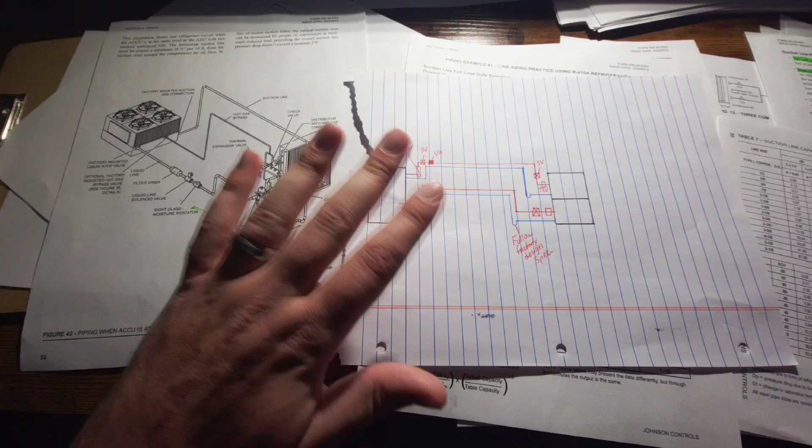Why does all of this matter? It matters because of our oil return and our ability to carry the load of the refrigerant. So if we don't size this properly, one, we're not going to get the proper BTU flow through the refrigerant stream.

Which means the system is not going to be able to keep up. We're going to have problems at the compressors and at the evaporators with them controlling load properly. And two, we're not going to get the oil return that we need, which is where these traps become very, very critical.

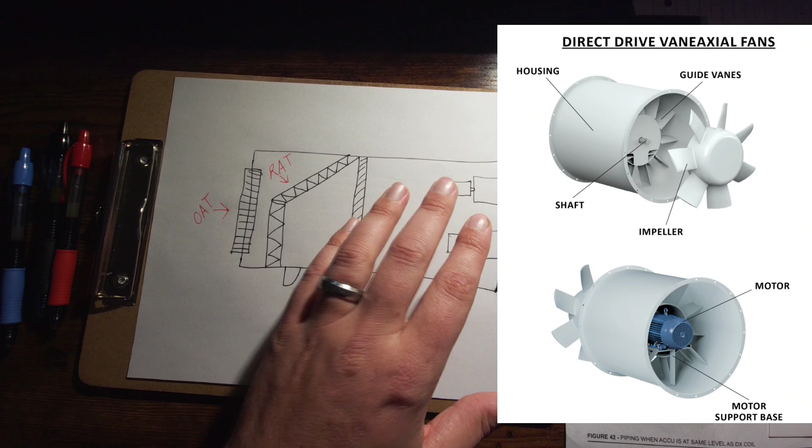What we're working with is we have an air handler on a roof that is serving a multi-story building in a downtown space. So this air handler has a vane axial fan assembly that is running all the supply air, and our refrigerated coils are right here.

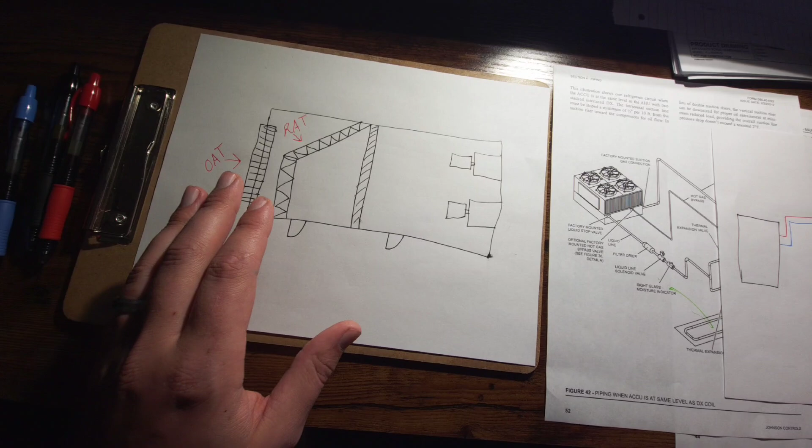Now we've actually got two condensers. They're split system carrier, they're 80 tons, that currently serve these coils. We're replacing those condensers and putting in new York YLUA 95 ton condensers in their place. That was an option that the customer requested.

They wanted their total system design allowed for the little bit of extra tonnage, so they went for it and chose it. So the scope of this job is we're coming in, we're moving these coils here, and this is actually two banks. You have one bank here and one bank here on an angle, and these two banks are what serve the supply air for this air handler running multiple floors.

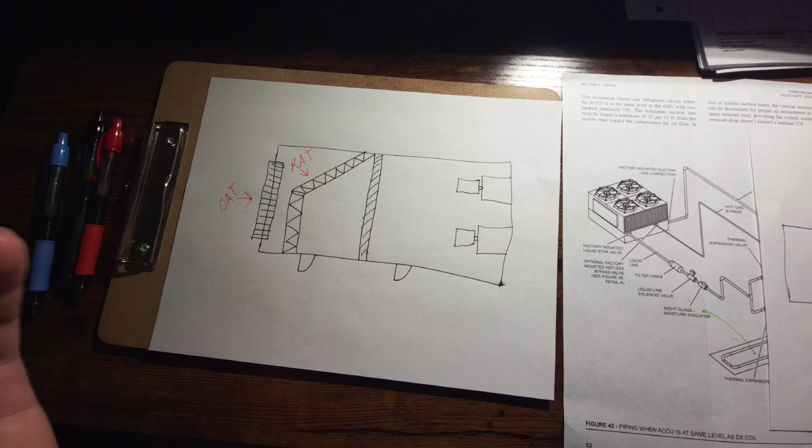The condensing units are over here to the side outside of the penthouse where this air handler lives. Typically in a situation like this, we bring the manufacturer in, we walk it with their design engineers, we go through this whole process. Jobs like these take a year, 2 years to put together, bid, go through, get approved, order. A lot has to happen to make these kind of jobs happen.

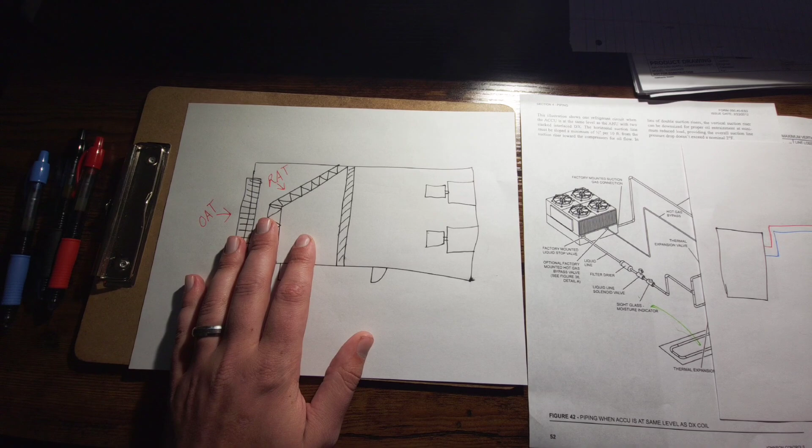When we got to the site and began to really look at okay, how did we need to finalize the piping schematics so that we knew exactly how to go back with this and what we were going to do, we could not get a solid answer from York as to what they wanted us to do. Specifically for this exact application, could we reuse the old line set? Could we get the new line set?

They wanted new systems, one, because they had really old carrier condensers, and they wanted something more efficient with better loading abilities and that had a newer refrigerant. So all of these are R22, and they wanted a 410A system.

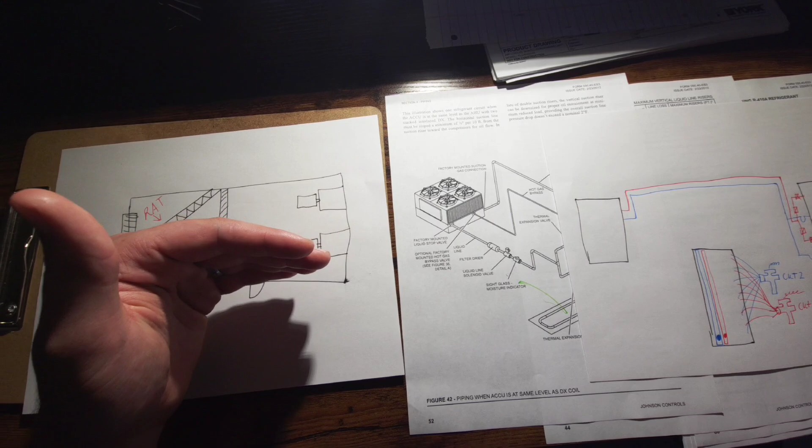The old carriers are semi-hermetic Carlyle compressors, and we had 2 circuits per condenser, 1 compressor each circuit, whereas the new system is 2 circuits, 3 scroll compressors per circuit. So we have a lot more loading and unloading capacity in our ability to really fine tune it.

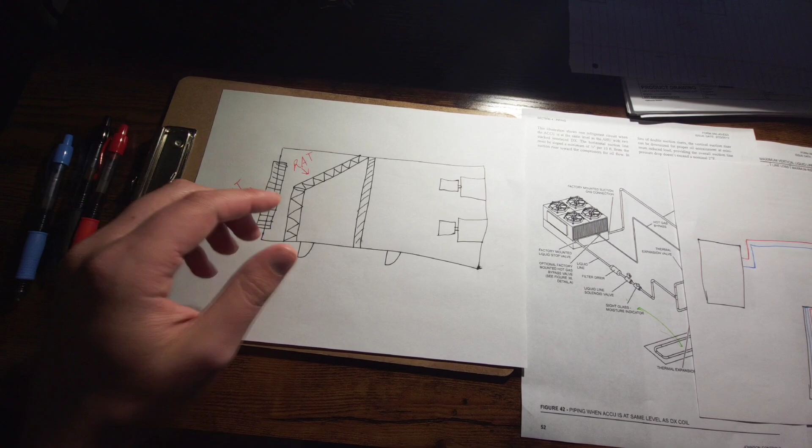And one of the struggles they had is during the low load times, they were constantly having issues having to short cycle the carrier condensers because they couldn't quite match the load the way they really needed to. And keep in mind, there's an automation system that makes this whole entire puzzle function. The condensers have some onboard controls that are mostly built there for safety purposes, but for the most part, building automation is actually what is controlling the brain for this entire setup.

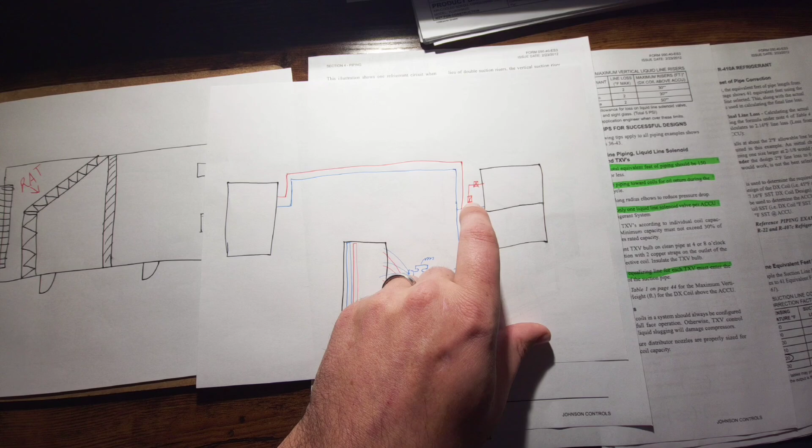To kind of give you an idea of how the original was set up, here at each bank you had a set of stacked coils, and this was times 2, and I'll get into what I mean by that. But each circuit had a liquid line that come out, and then it would hit this little header assembly, and they went through 2 solenoid valves and then went into each TXV, and then the suction lines came out, had a trap, and then hit a header that come up and come all the way back to the condenser.

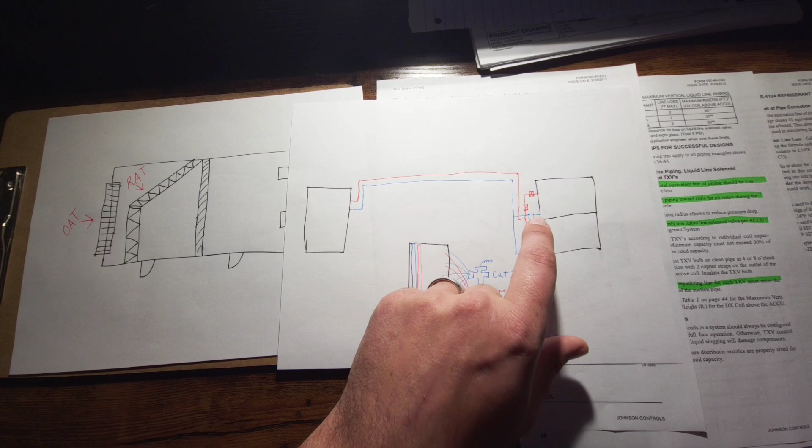They ran 1 1/8 inch liquid line and a 2 1/8 inch suction line for this on this R22 system. This was times 2 for the other circuit. So you had another set of liquid and suction line come out and did this exact same thing, and kind of a depiction here of it is each TXV, you've got the distributor tubes that kind of split the entrance of the coil, and what that means is this entire coil, both coils in this instance, are actually having refrigerant flow the entire time.

We are processing all of the air moving through this coil at any given time, and it would be the case for both sets of coil banks. You see the suction headers come out the other end of the coil and flow through. I have another diagram here I will show you.

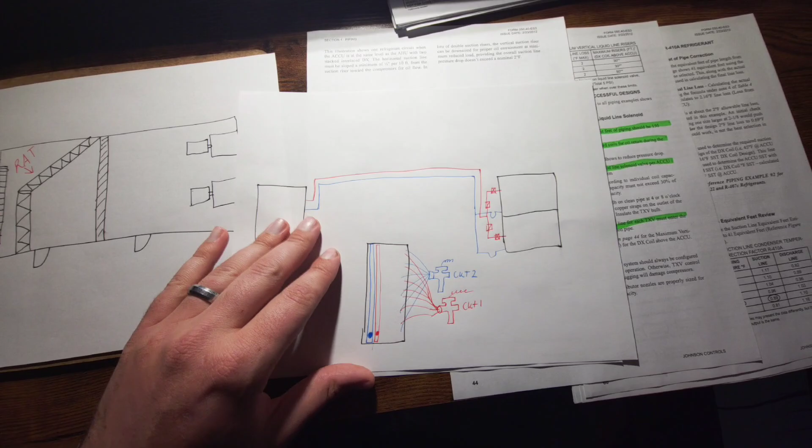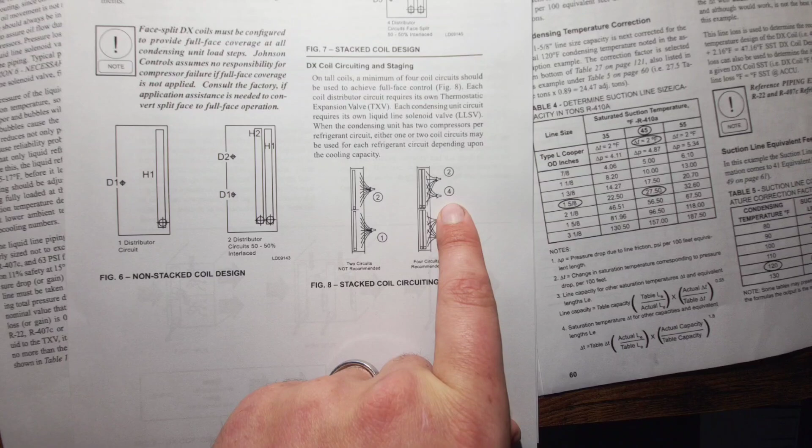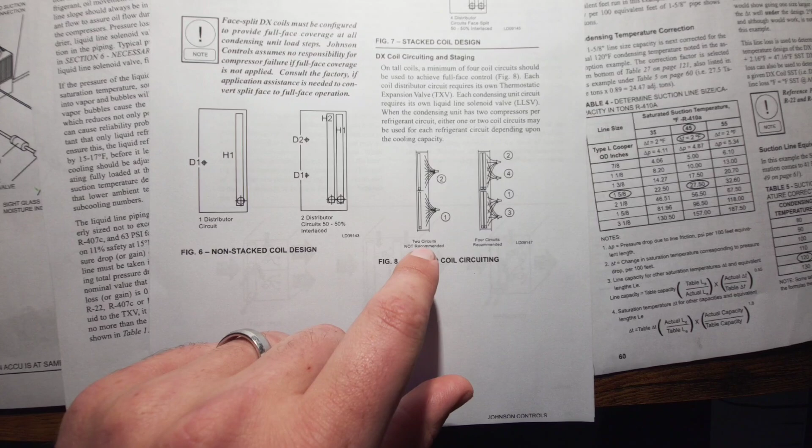On this diagram, and what's funny is that this is all York data, by the way. They state that their recommended setup is a 2-circuit coil stacked, when you do a stacked coil system like this. Your circuit 1 would have TXV 1 and 2, circuit 2 would have TXV 3 and 4, and those would serve in a stacked coil instance. They even specifically say in a 2-circuit or stacked coil scenario not to do individual circuits. You know what's funny? York designed this to be exactly this way, against their own specific recommendation.

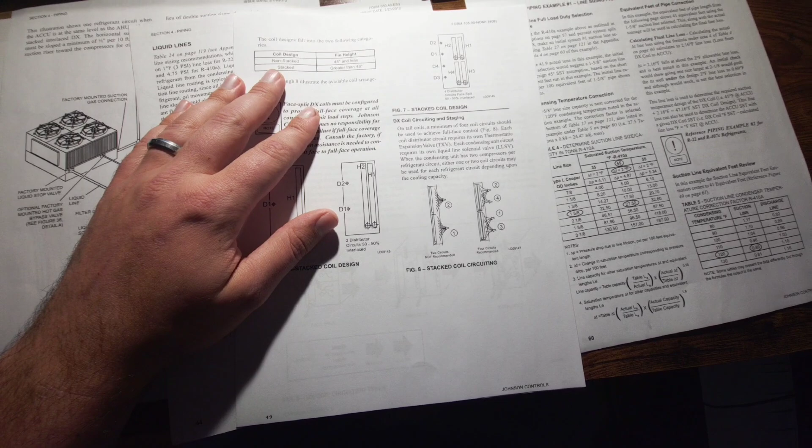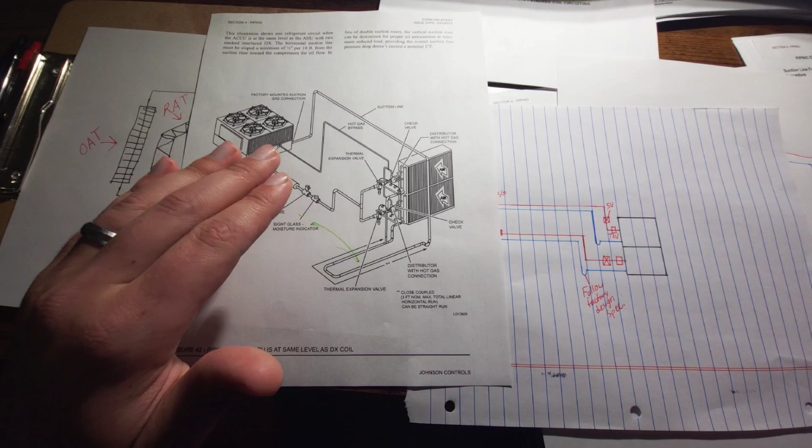That is how the current system is set up that is in place. What that left us in is now we're in a position where we've got a completely different setup. We've got a situation where we've got stacked coils, and they're expecting us to serve one coil per condensing unit. When we first got all this paperwork and got the design based off their own paperwork, which we are level, this unit is designed to where the evaporator could be several stories above the condenser, could be several stories below, or even at the same level or same story as the condenser.

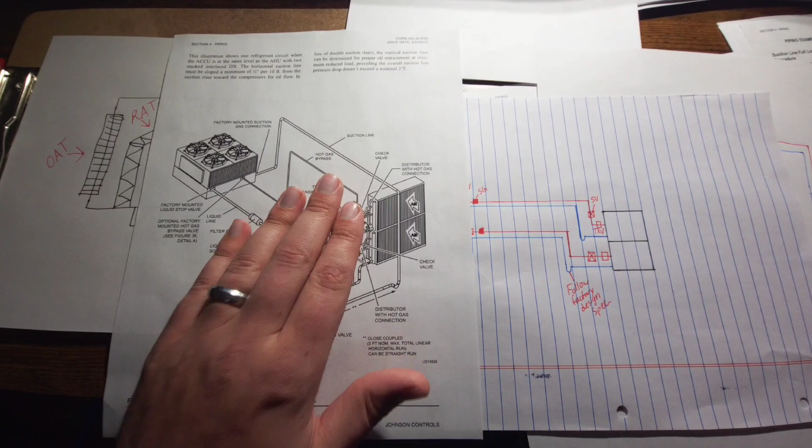It's just traveling across a horizontal face instead of having any kind of vertical run. Per their own setup, this was how they were depicting they wanted us to hook it up. The problem is we've got a 2-circuit machine, and that's not the way. This is not what they sent us when they gave us all the material, the coils. This isn't what it looked like. It didn't look like any of this, because here you've basically got one main liquid line coming in, splitting between the coils, which, going back to their schematic, this is what they recommend.

They want you to have a split header so you get all the surface area covered, and then you would have one main suction riser coming back up and out, going back to the condenser. You can also have a hot gas option. I'll talk about that more a little bit later. We do not need that with our current setup.

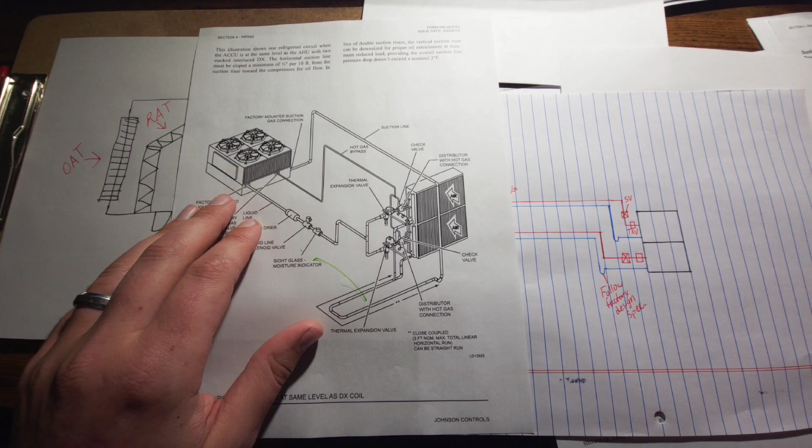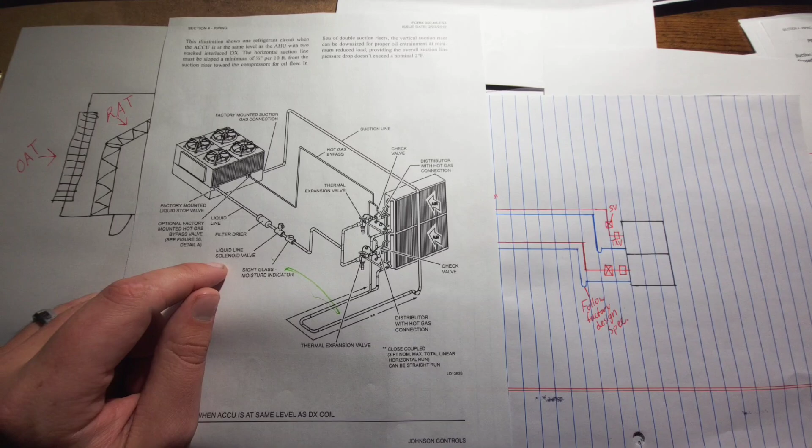One of the things I do want to point out as I'm going through this is the design principles, for you guys who are still in school, maybe looking to go to school, getting ready to. There's going to be things they cover in terms of oil return, velocities, and proper piping design if you go to a really good program. I know there's programs out there that don't even bring that stuff up. But if you do, don't brush over that information, because I remember doing this stuff when I was in school, and jobs like these are where it came to really benefit me.

So what that led us to is, okay, are we actually supposed to have a split coil setup, or were we supposed to have a dedicated coil, meaning each coil was going to be dedicated to a single circuit? Because if we're looking here, we have one set of liquid and suction line coming out and another set for this circuit. So here's your 2 circuits. If we're supposed to run these together, this machine was not designed for circuit 1 and circuit 2 to all of a sudden become one big tandem circuit. That was going to cause a lot of problems and complications.

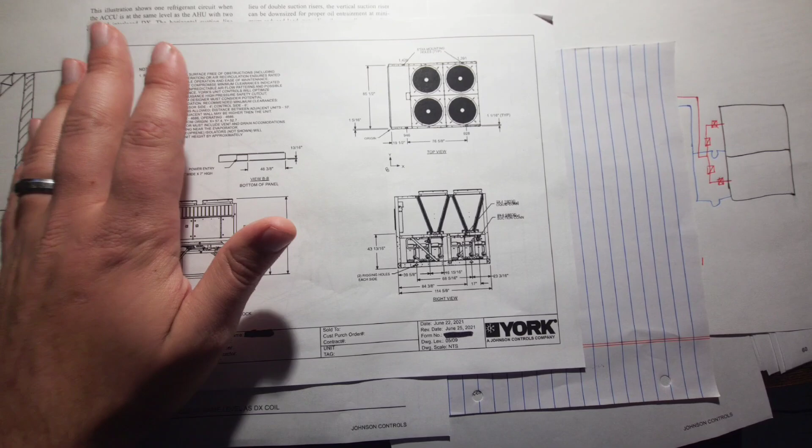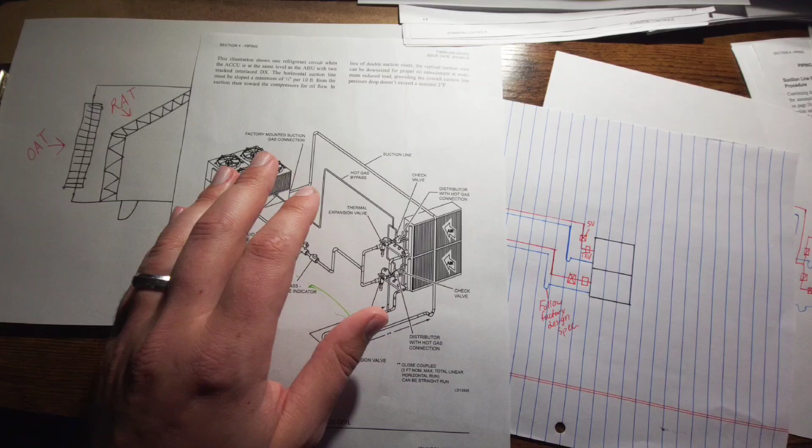Honestly, ultimately, it doesn't make a whole lot of sense that they would have us do it that way. Between the fan cycling controls and the compressor controls, and then the velocity issues we were going to have because we had such big pipe at that point, it just did not make sense that we could have reasonably needed to tie the 2 circuits together the way it was being depicted. What this is leading to is York is contradicting themselves in how they actually designed the system versus what their recommendations on system design is.

Eventually we came to the understanding that we were going to need to do a dedicated coil per circuit. That was the simplest thing, which meant that this header assembly went away, this whole setup went away, and that was no longer going to be the case. We weren't going to have this, because the coils we received were single circuit coils, actually just like the ones depicted here. These are single circuit coils. This would be considered a dual circuit coil.

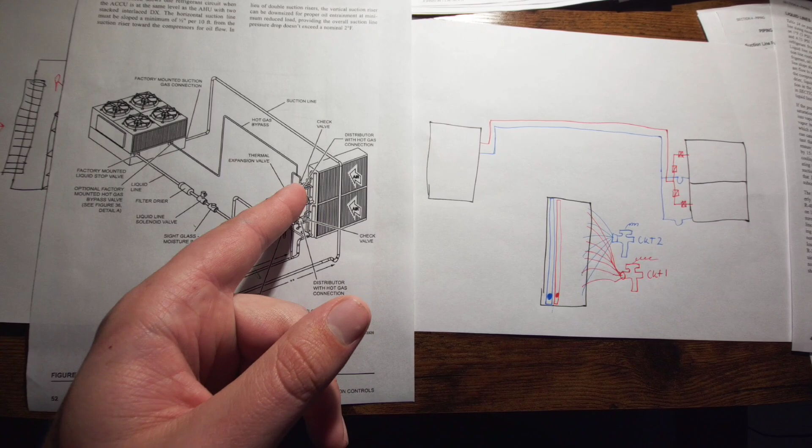So we got these coils in to replace the existing coils, which meant that our overall design did change when they sent us this equipment. Now that has other ramifications that I'll get into later about how the automation system is going to be able to control that, and we'll discuss that in a bit.

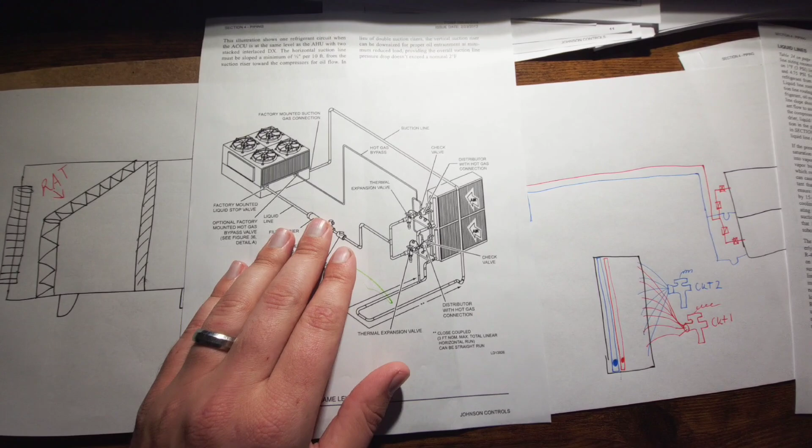But then we had to decide, okay, is the existing piping going to be sufficient? Can it stay? Do we have to replace it? Keep in mind, we're talking about replacing almost 100 feet per circuit worth of copper. You're talking 4 circuits total. We're talking tens of thousands of dollars worth of copper and manpower to do that. That's a major expense to go onto the project.

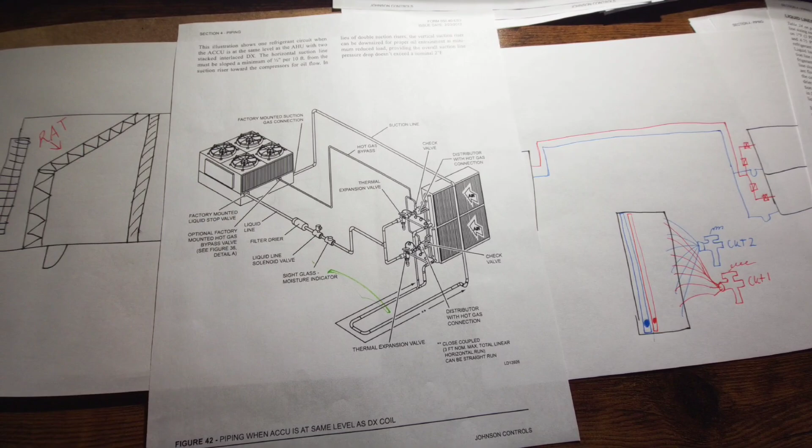Obviously, with a 410A conversion, we will need to do a flush on the line set if we decide to keep it. So with us settling on, okay, York intended us to have dedicated coils - I know everything in this book tells us that they never want that to be done, but ultimately that is exactly what they sent us. We have 50-ton circuits on this machine, and those circuits are able to go from that nominal 50 tons to a little over 17 tons.

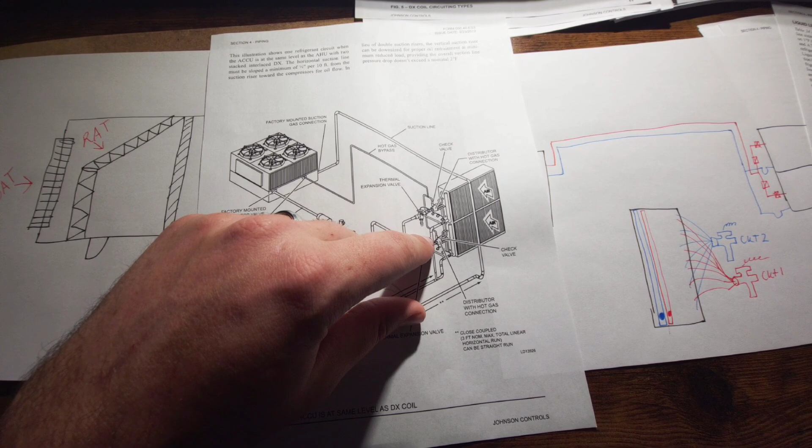These TXVs being 50-ton valves, they're the OVE 50s. They have an ability to derate themselves down to 30% of total capacity, meaning that if you do the math on that - so that is 50 multiplied by 0.3, takes you down to 15 - so we can do as little as 15 tons of refrigerant volume through these valves and still be able to maintain superheat control on the suction line. So that matched up perfectly.

Now we're entering a stage of, okay, what lines do we actually have? Like I said, on average, you've got just shy of 100 feet of actual line set length. I'll use one unit for an example - has an actual length of, we'll use the liquid line, of 60 feet total. Now, there's some things and some design parameters you have to take into account when you start looking at this. So that's 60 feet from the unit to that coil and where we're tapping on that TXV. We have to calculate the physical length and each of these turns.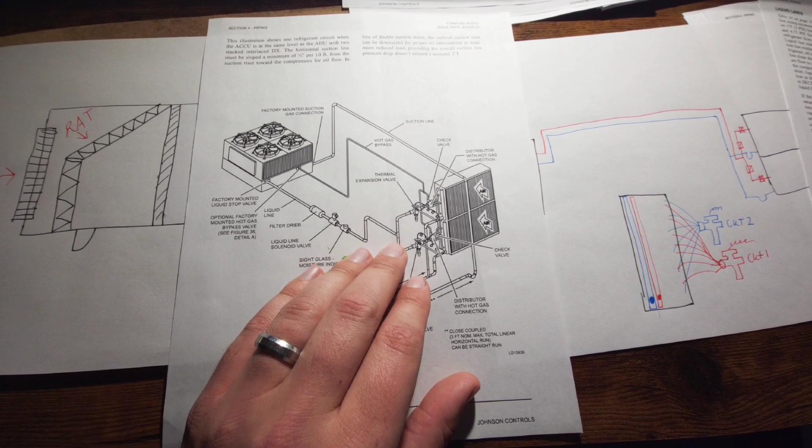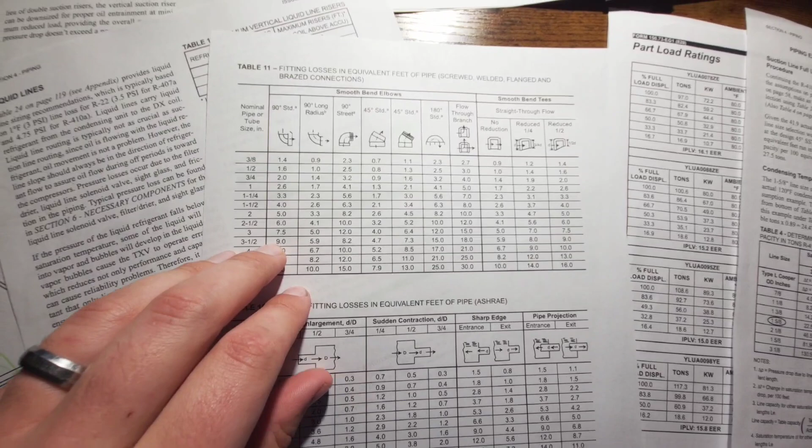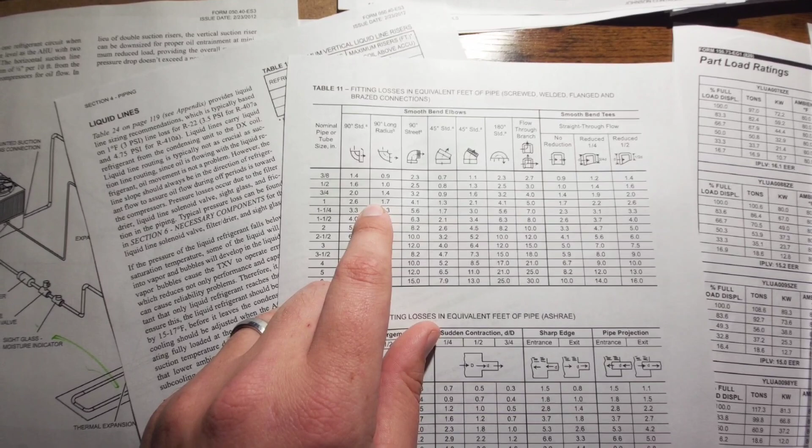Each 90 and T, every one of those joints creates a restriction in the system. So we have to calculate that into our overall total footage, which I have a chart here. This chart does exactly that. So we're able to go, and so we know that this is in OD sizing. So 1 inch is our 1 1/8 inch. So we know that for every standard 90 installed at 1 inch on the liquid line is equivalent to 2.6 feet of actual line length. That's the amount of restriction that it creates. If you use a long radius, you're able to cut that down to just shy of 2 feet.

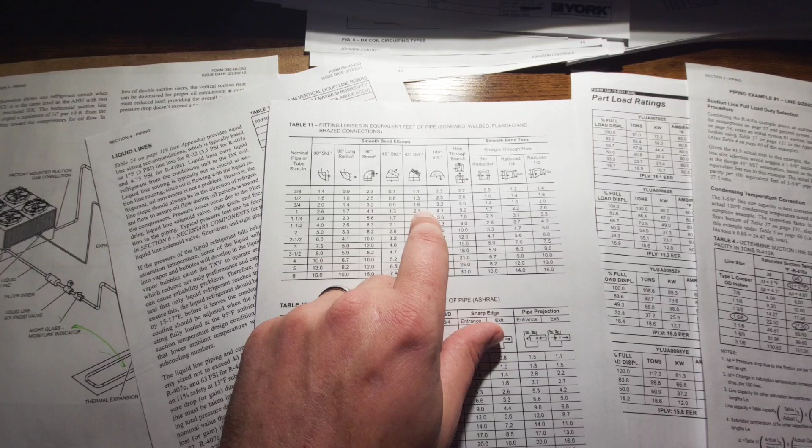So as we roll through this, these are the additional calculations we're having to factor in. So over here, that actual 60 feet that is the physical length measured, you calculate the joints that we have to create to get from here to here, you end up with actually just right at 100 feet, which fortunately for us is right at design specifications. Per their ratings, they will allow 100 effective feet or 150 calculated feet based off of their piping designs and the information they sent us on this equipment.

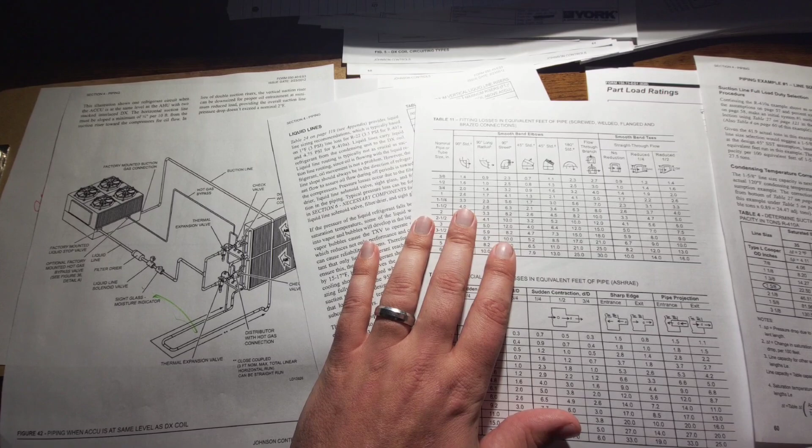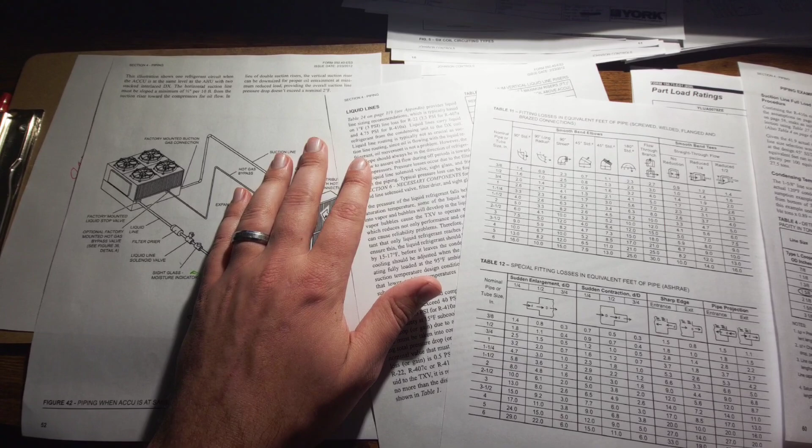They quite literally sent us 5 different submittals for this equipment and coils, which totaled out to be about 300 something pages worth of documentation. I was able to sort through that because that was blended between 410A, 407C conversions, and R22 systems, and I got a little under 100 pages worth of relevant data to just the 410A side, which is what I was focused on, and I've been able to extrapolate everything I need from there.

We know that we're pushing the limit on the line length, with it being 1 1/8 inch. So the existing system is 1 1/8 inch on the liquid, 2 1/8 inch on the suction. There's some things we have to keep in mind as we're going through this.

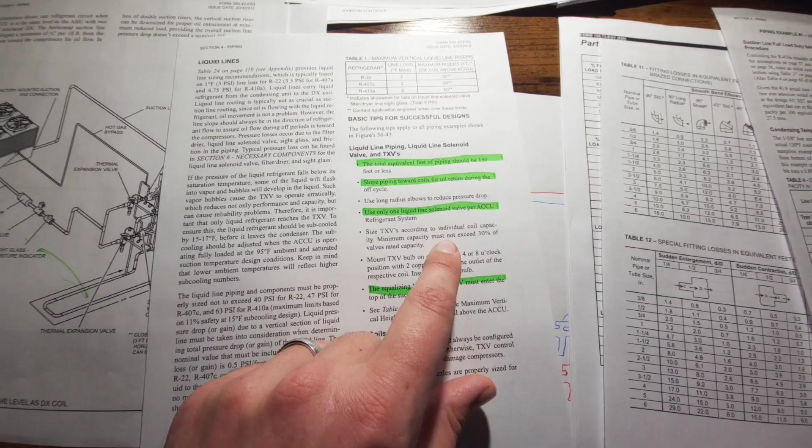One big thing that stands out is they want us to only use 1 liquid line solenoid per circuit. With the way they originally had it, they had 2 solenoid valves per circuit, 1 per TXV. We will look exactly like this going into our system, where we're coming out the liquid line and we'll come down and tie into each coil. So this would be like circuit 2's coil and circuit 1's coil.

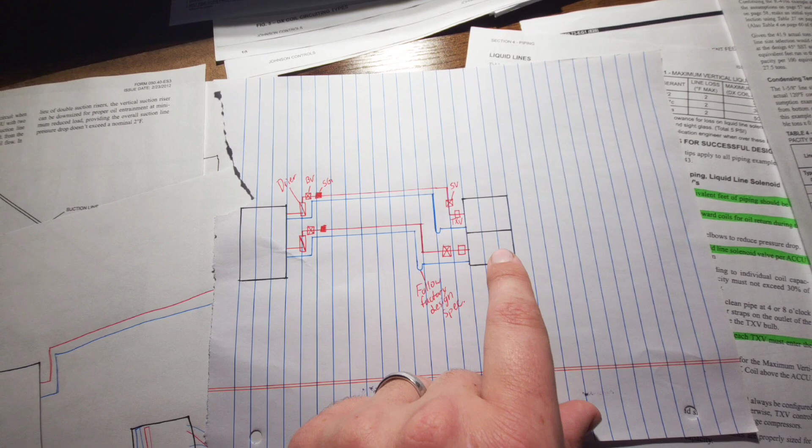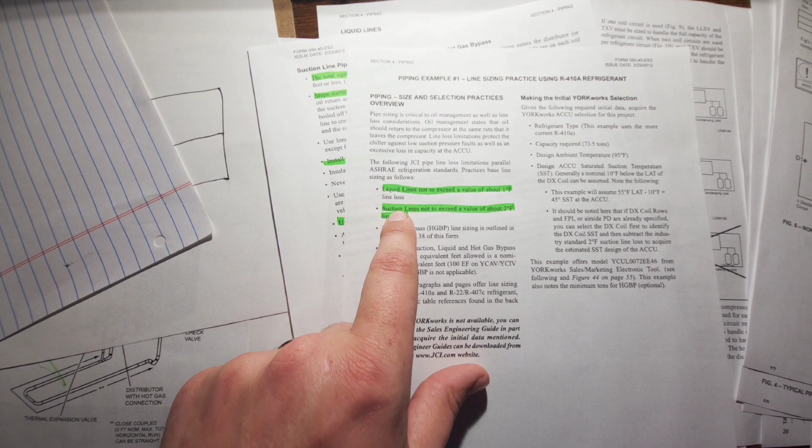To factor that, we really need to know what line sizes we need. York has some very specific design parameters for when we're doing the calculations for the liquid line. We are not to exceed design parameters for 1 degree of temperature loss on that line. That's going to play into what size of pipe we're allowed to choose based off of that parameter.

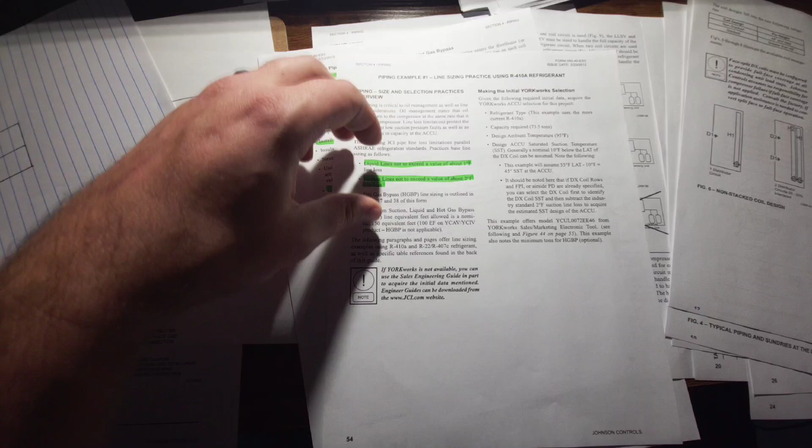At the same time, the suction line, we're not allowed to gain more than 2 degrees of that loss. Those are very critical design parameters because you can have different numbers there, but for this system to function properly, that is what York is calling for. Now we have to stay within that.

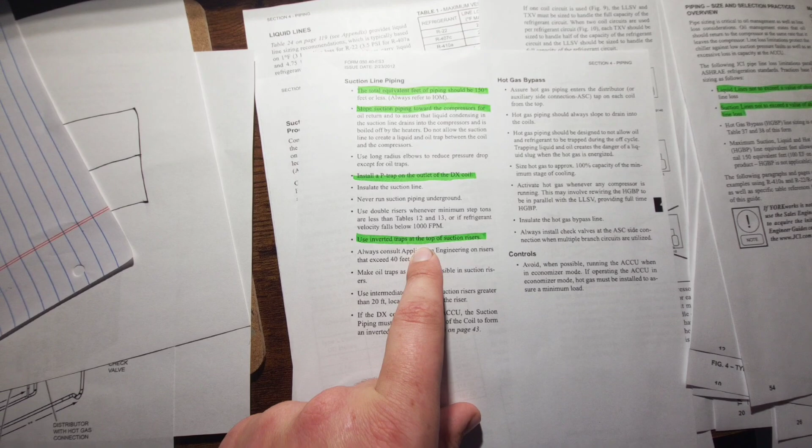A couple other things we have to take into consideration is they want P-traps on the outlet of the evaporators, and if we have actual suction risers, we have to have inverted traps. We do not have a true suction riser. Even with the system setup we have here, this is not considered a true riser. It's all one level on the same floor. And you can even see they don't depict having a suction riser there.

But there is a primary P-trap. Now I'm not having this extra loop here that you see depicted. We don't need that for our particular setup.

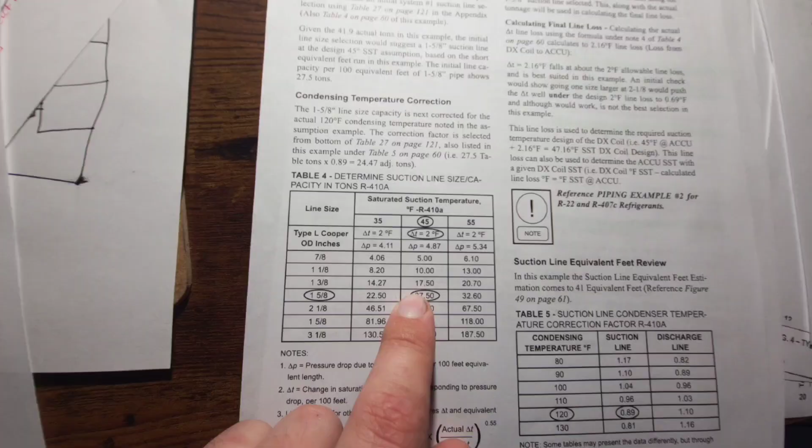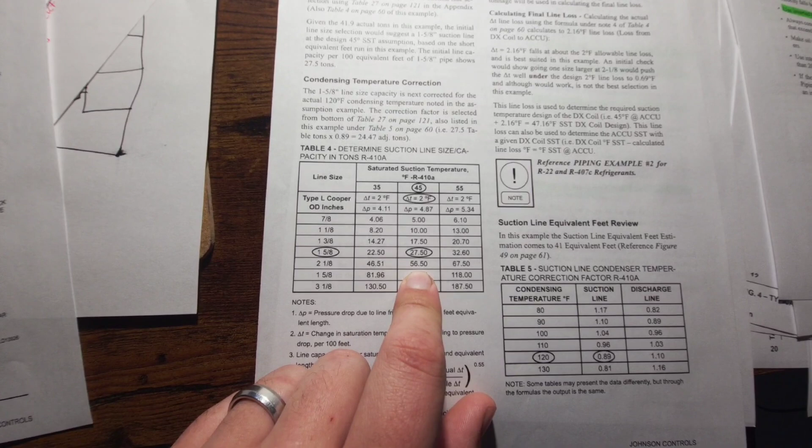York does give us this diagram, and our design spec was designed for 45 degrees of suction saturation. That's at a 2 degree loss. And if we go up to 2 1/8, which is what we currently have, we're allowed 56 tons total of volume through that pipe. I do want to point something out here.

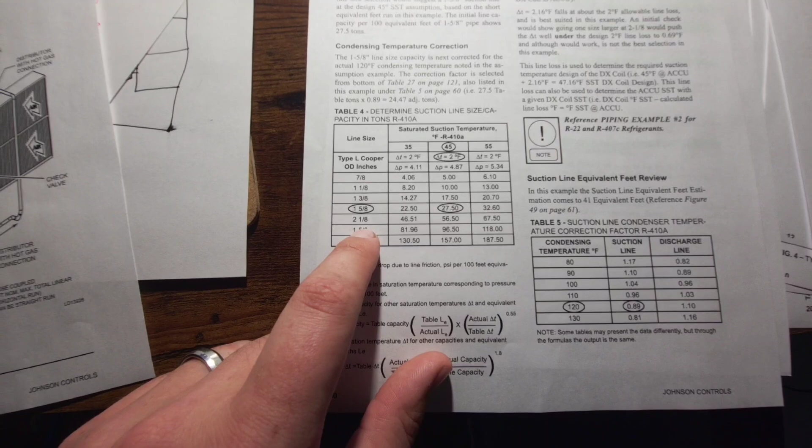You see that? That was a typo made by the manufacturer. That's supposed to say 2 5/8 and then 3 1/8. Be careful, guys, be very, very careful. Something like this will mess you up bad. So just pay attention to what it says.

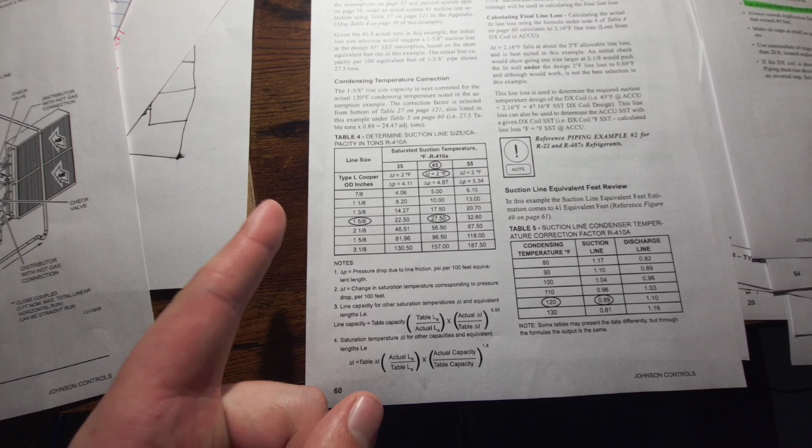56 tons is okay. Now, I said earlier we have a 95 ton unit, but each circuit is a nominal 50 tons. So 56 tons covers our current conditions, and this is at 100 feet worth of line.

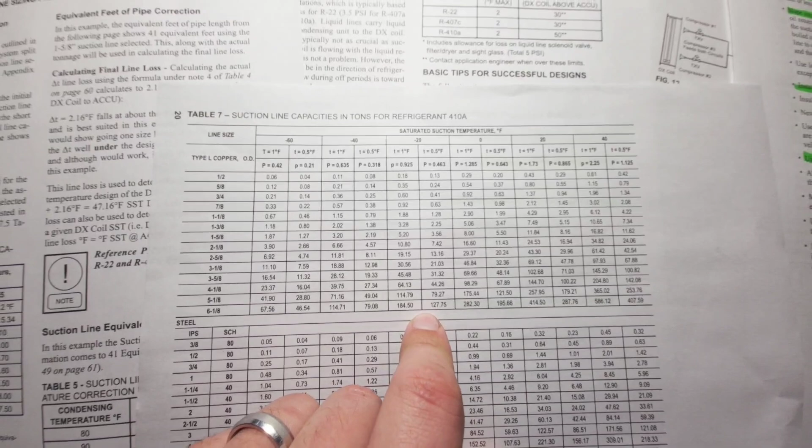They have this diagram, but they also provide this chart, and this chart is very similar, but it is different. And you see up here at 40 degrees of saturation at 1 degree loss, and this is for suction line, we would end up with, to get our size, which up here this is rating at 61, that's going to bring us across to 2 5/8.

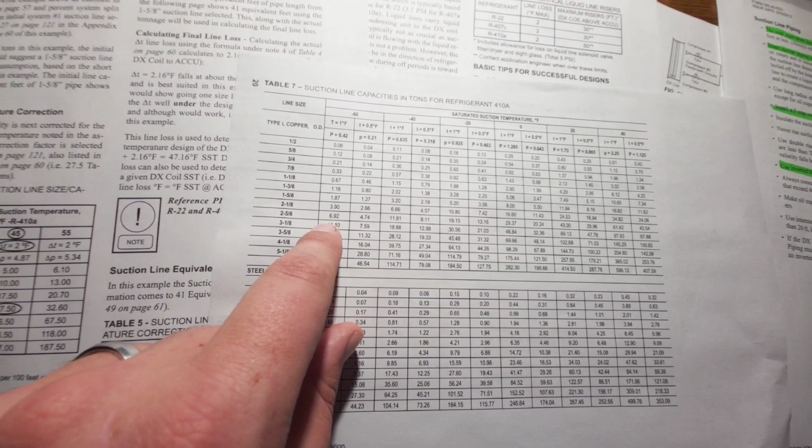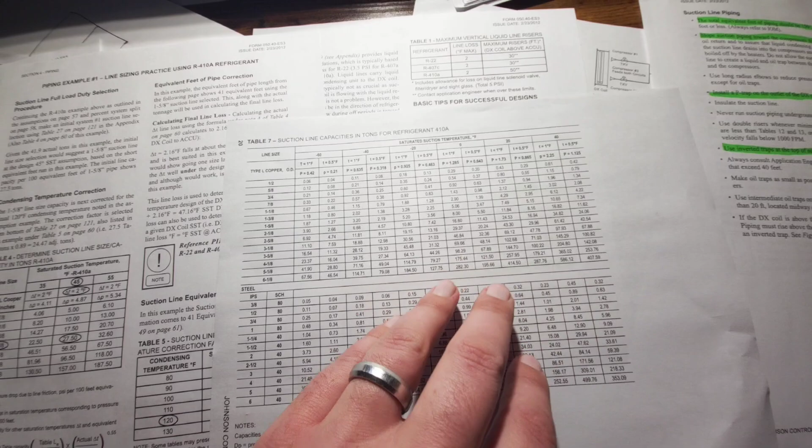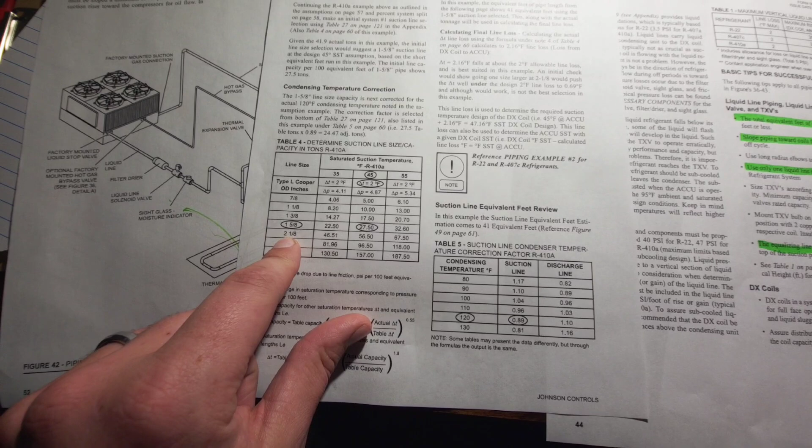Now what this means is if we were designing, or if we had designed for a 40 degree saturation, we would have to be stepping up to a 2 5/8 suction line to support the tonnage of this system. But because it wasn't 40 degrees at a 1 degree loss, which adds a lot of volume requirement, we were only at 45 degrees with a 2 degree loss. That made it possible for this 56 at a 2 1/8 suction line to actually work. It's just enough, but per their own parameters, they say it will work.

Now, we obviously are definitely going to have a trap, and I'll show you my schematic I drew here earlier. We're having suction traps right here coming out of the coils. That is a given. Why does all of this matter?

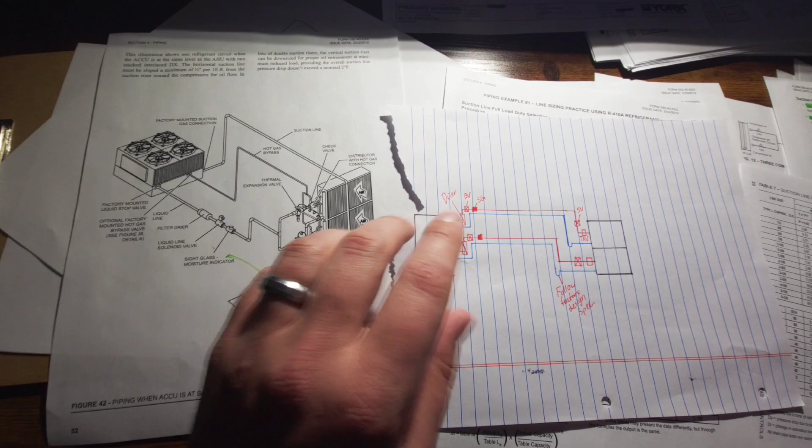It matters because of our oil return and our ability to carry the load of the refrigerant. So if we don't size this properly, one, we're not going to get the proper BTU flow through the refrigerant stream, which means the system is not going to be able to keep up.

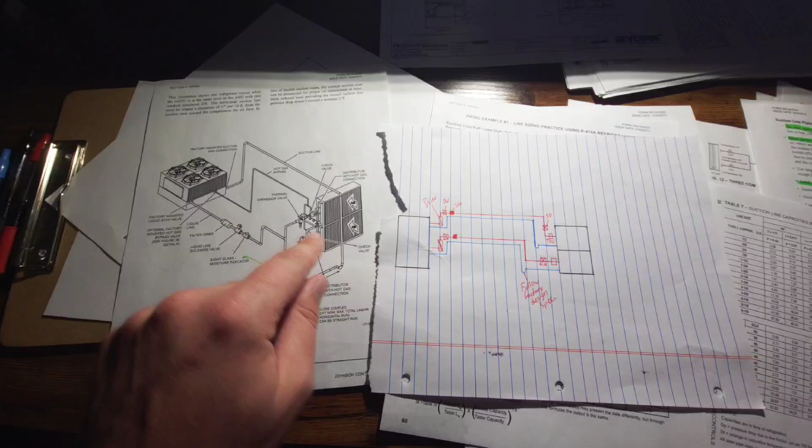We're going to have problems at the compressors and at the evaporators with them controlling load properly. And we're not going to get the oil return that we need, which is where these traps become very critical. If you're spanning floors and have a true suction riser, you have to look at having traps, and if spanning multiple floors, install traps in between the floors just for your oil management system. I've worked on systems that didn't do that, going 3 to 4 floors with no traps in between, and it's not going to function.

They're always going to be burning compressors. We were able to reuse the 2 1/8 suction line and just repipe it in on that single coil.

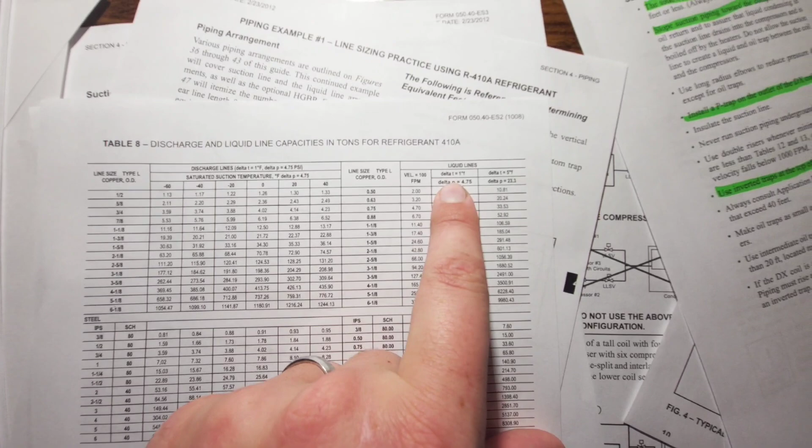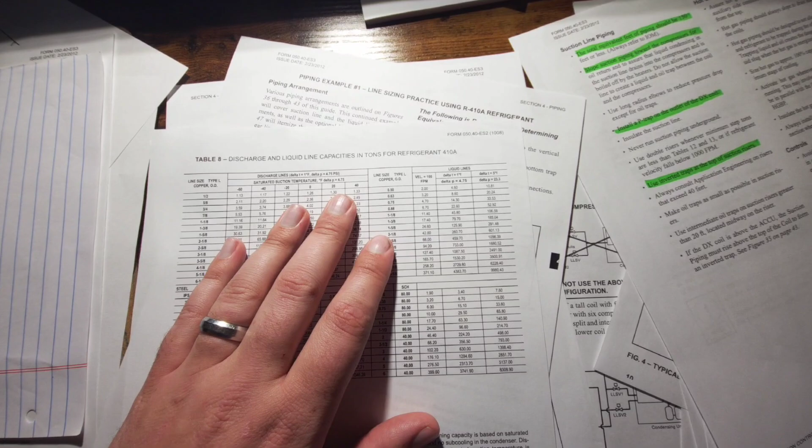The next question becomes, what about the liquid line? Thankfully, the liquid line doesn't have quite as many heavy parameters as the suction does, but it's still important because we have to maintain proper velocity and volume. We have a different chart for liquid line size, and with a 1 degree drop allowance, we come down to our tonnages, showing 45 tons for 1 1/8 inch. That means we could not be any closer to pushing our design limit for that 1 1/8 inch. We've got a little bit of wiggle room, and these aren't extremely exact numbers - it's a nominal 50 tons, actually 40-something, right at that 45 mark. So if we were an extra 15-20 feet longer on our pipe length, we'd have to upsize the pipe here. Thankfully, we have just enough room to make this work.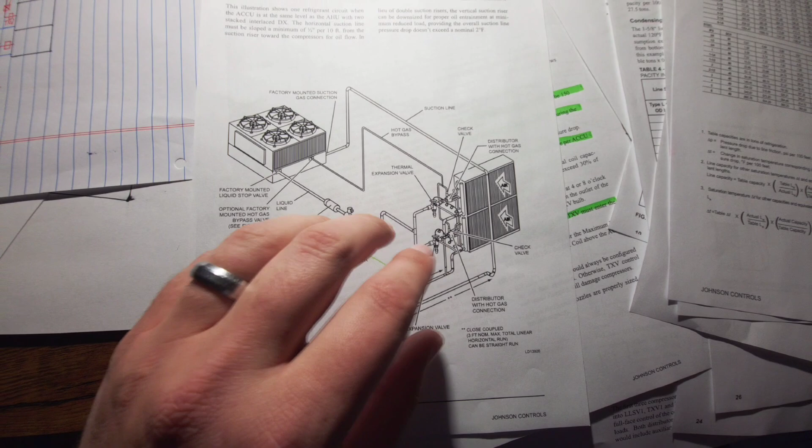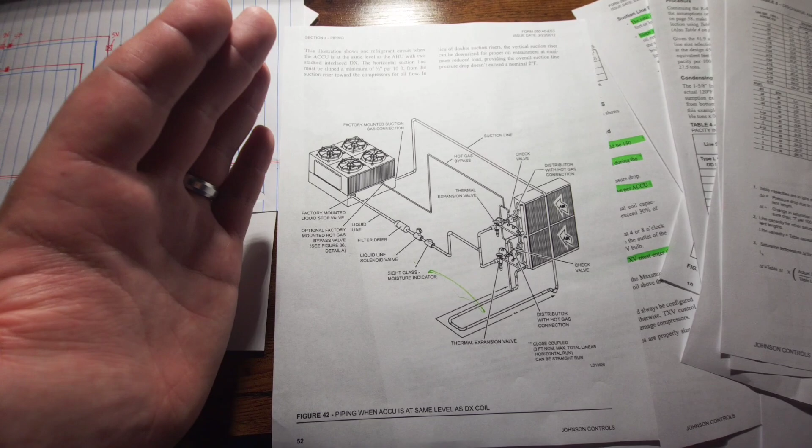What about the hot gas bypass? They did not send us coils with the distributors having a hot gas bypass circuit attached. You can see that depicted here - that's a special adapter that goes onto those distributors for that purpose, and it's not there on the coils they sent. Looking into it, the hot gas bypass is there to help assist with lower load conditions so you can maintain proper coil saturation and temperature at less capacity. Reading their specifications, they spec that if you needed to use hot gas bypass, you could get down as low as 5 tons on this system. At the end of the day, though, we do not actually need that.

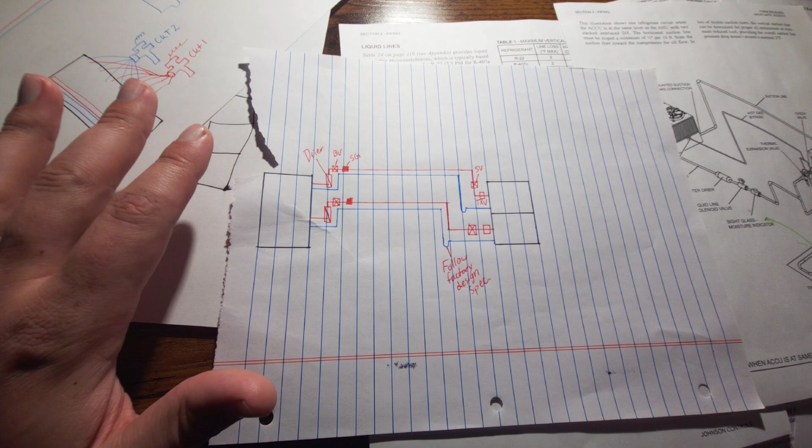That ultimately leads us to our final design. We're no longer going to have these split lines with headers where our liquid lines go to 2 valves and so forth. Each circuit is going to come across and tap into 1 TXV, and you're going to have 1 suction with 1 trap. Per their specifications, we can come out of each of these coils, process through our trap on the suction, make it back to the compressor, and come back in with 1 solenoid valve hitting that single TXV, and we'll be perfectly fine with that. This system gives us a lot more flexibility once set up properly, because with 3 scroll compressors, our ability to match load conditions will be much greater than before.

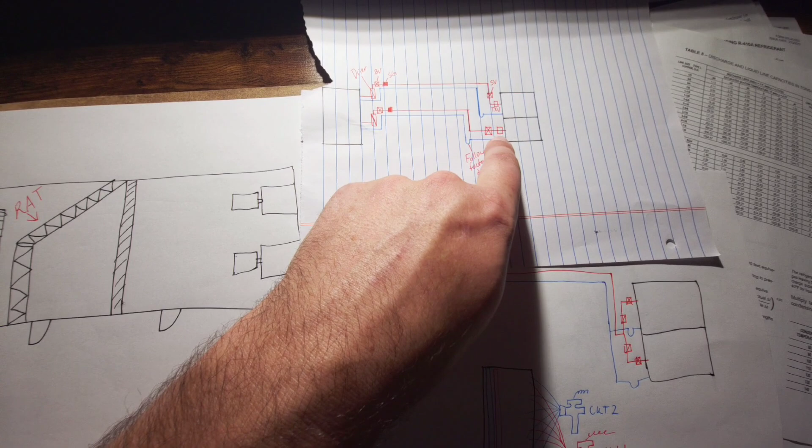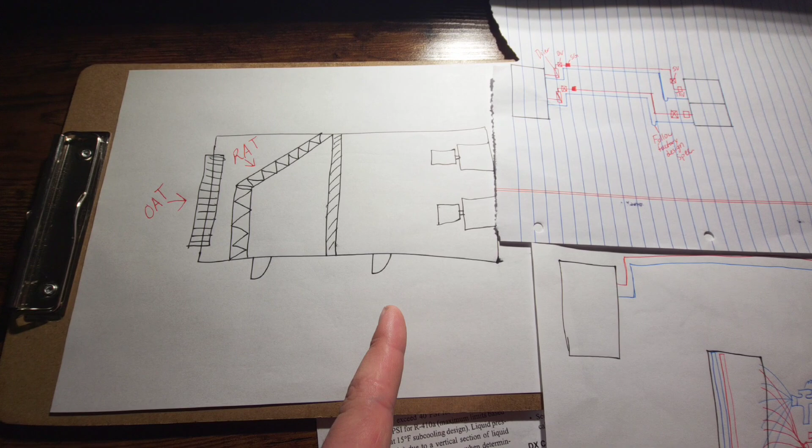Now let's come back to the main air handler. There are some drawbacks we have to keep in mind. When running the system like this, if circuit 2 is off and circuit 1 is the only one running, that means all the air processing through that other coil isn't doing anything. You have to take some very specific design and configuration parameters into account when you do this. This is where we had to have a very in-depth plan with our automation side that controls the system. At any point, this system had to be configured so that it ran a balanced load across the circuits - it could not do an actual lead-lag setup. A lead-lag would run circuit 1's compressors 1, 2 and 3, staging up and getting fully loaded, then look at bringing on circuit 2 if required. With a balanced load configuration, we'll cycle 1 compressor per circuit at a time.

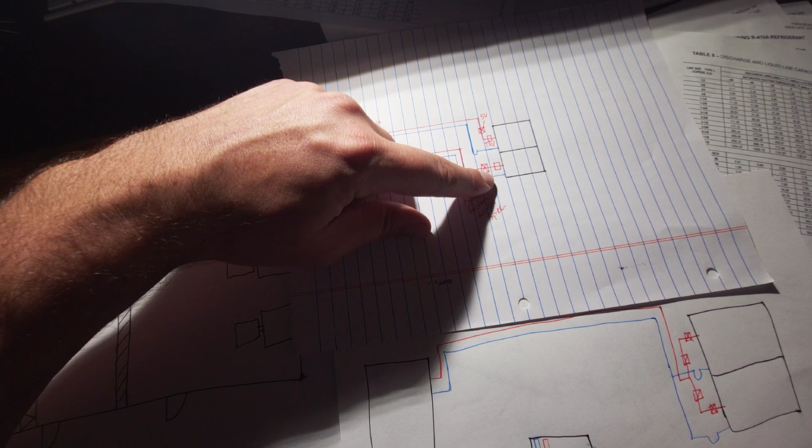So stage 1 would be C1 compressor. Stage 2 would be circuit 2 compressor 1. And then back and forth, it would hopscotch on the staging up of the circuits. What that will do, if our 2 lowest stages is one compressor per coil, is make sure that we're processing all the way through.

Now, there are real conditions we've run into before, where during mild times of the year, running between 70 to 60 degrees outside, it's not cool enough to run free cooling. So we still need mechanical cooling, but it doesn't take a whole lot for the circuits to satisfy a 55 degree supply air. It's just such a little load, but we have a ton of humidity even at that point.

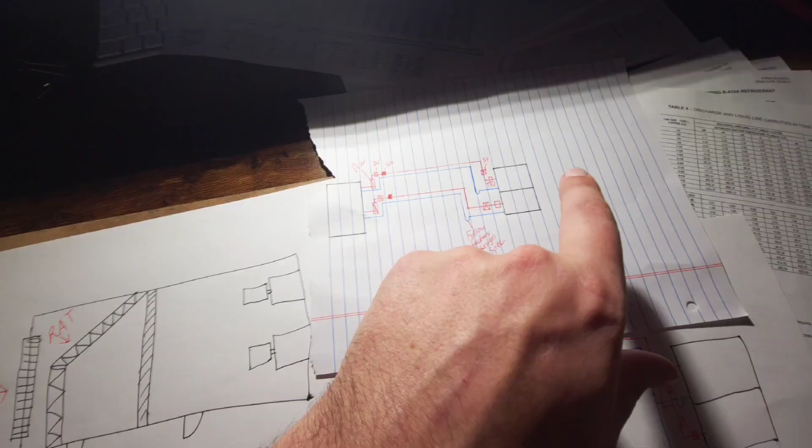We have very saturated conditions in our area, not to mention all the humidity stacking up in the building. A setup like this, if we didn't do it properly, will cause us to lose control of the humidity in the building, which creates condensation issues and makes it very uncomfortable for the tenants.

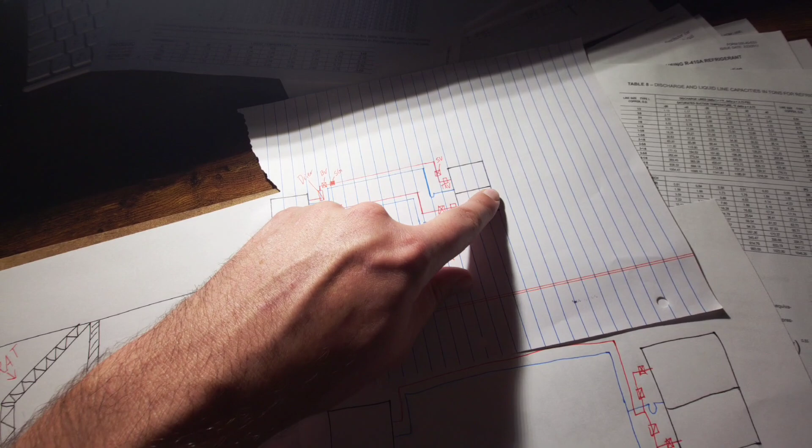We have to make sure we're staging the circuits properly, but then our automation team is also looking at installing louvers on each of the coils. What they'll end up doing is build a logic program that works with the supply fan commands, so that if we only need circuit 1, compressor 1 to maintain supply air on that condenser, it will close a set of louvers and stop flow through the additional coil, so we're only moving air through this coil.

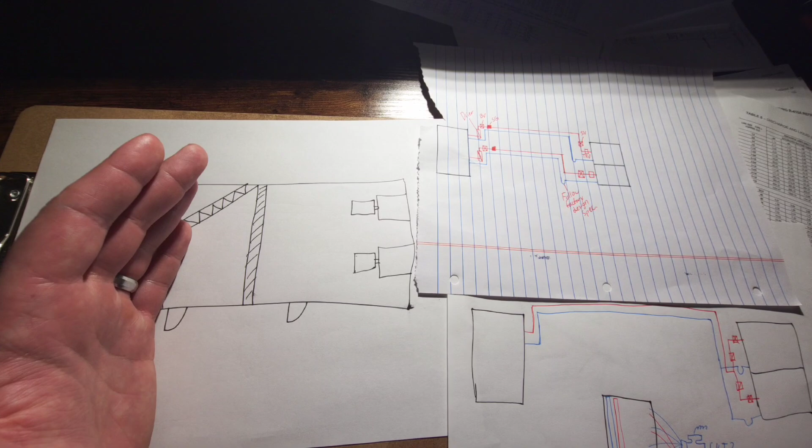Now, granted, you're talking about a time where we have a really low load. What that's going to do is process all of the air we need to process through that single coil, and make sure we're not allowing too much humidity to stack without it being processed at all in the space.

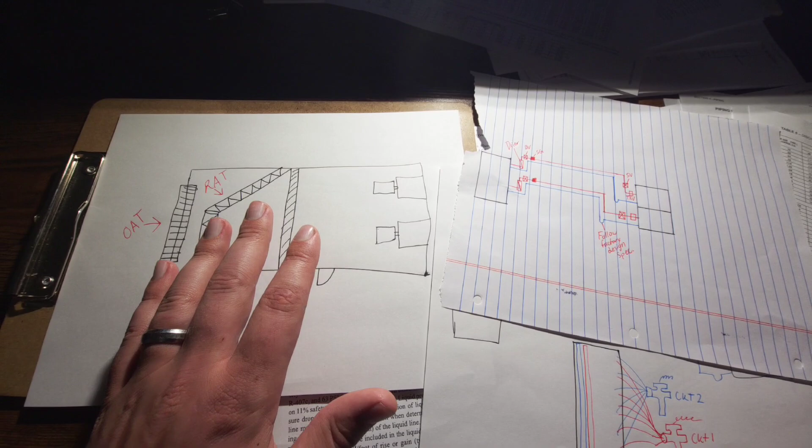And if we do that on both sides of the system, it's really going to help protect the building from having high humidity issues or anything of that nature that causes discomfort. This is not a fix for everything. This was a very specific look at a very specific situation.

My overall goal and what I was trying to point out was, one, I wanted to give you a picture of some of the stuff we can get into. This is not something an everyday technician would do. This is just one area you can get into to really expand yourself in your career, and in my opinion, it can be really neat.

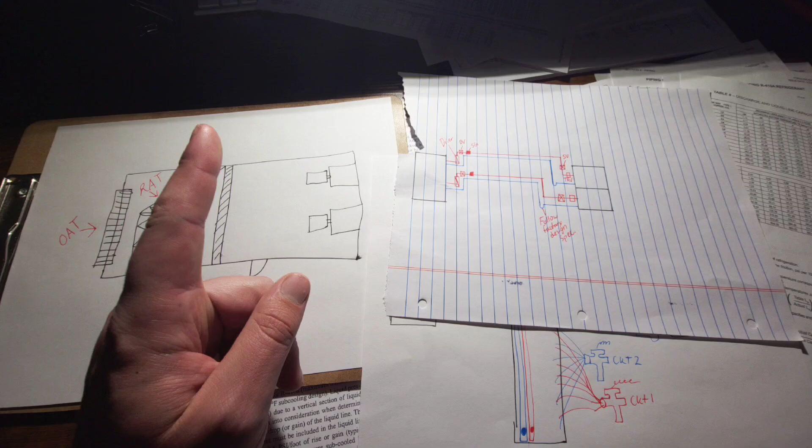Now, it takes hours of sitting down, reading through, getting very specific, and even making very specific notes. There's an exact procedure they want you to follow to set up this trap. Ultimately, you have to stick to the manufacturer's guidelines, because if you go outside of their design guidelines in any significant way, it makes a really easy case for them to come in when they have to start issuing warranty problems because of design issues.

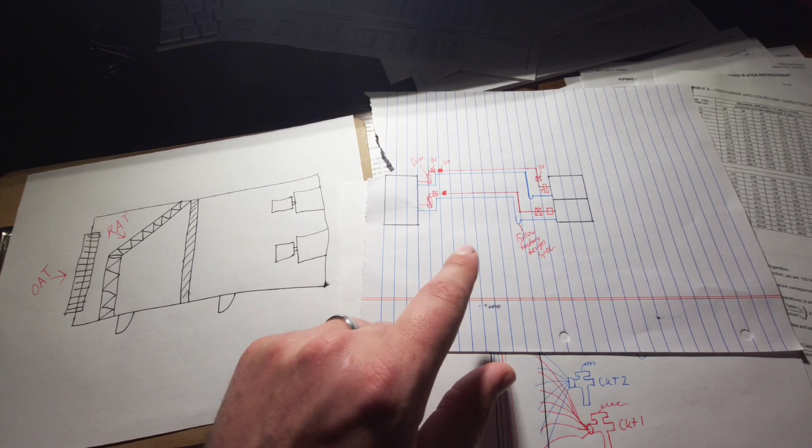They'll say, well, you didn't do this properly, you didn't set this trap up right, or you didn't do this, you didn't do that, and because you have no documentation to prove we told you that you could do that, you now own this — the warranty is void and it's yours. That's the kind of stuff we can get into and what you have to be really careful of.

So it takes a lot of time to really go through this. This is not an exhaustive how-to for building out every large commercial system out there in piping design or anything of that nature, but I did want to share this experience. This isn't something I get to do all the time, but when it does come across my desk, I really do have fun playing with it every now and then.